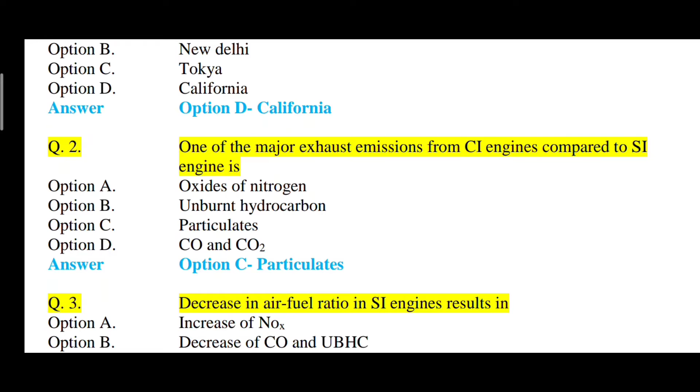Question number 2: one of the major exhaust emissions from CI engine compared to SI engine is option A, oxides of nitrogen, option B, unburnt hydrocarbon, option C, particulates, option D, CO and CO2. So the correct answer is option C, that is particulate matter. It is observed that PM, meaning particulate matter, is the main component of the exhaust gas, which is very toxic and very dangerous, and it is a mixture of liquid and dry particles. So option C is correct, particulates.

Question number 3. Decrease in air-fuel ratio in SI engine results in option A, increase of NOx, option B, decrease of CO and unburned HC, option C, increase of CO and unburned HC, option D, none of the above. So the correct answer is option C, that is increase of CO and unburned hydrocarbon.

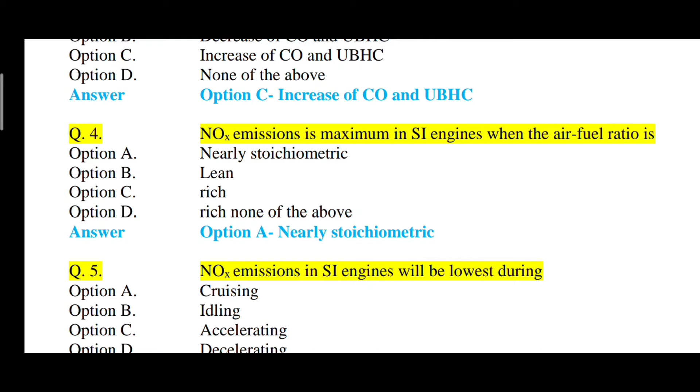Question number 5. NOx emission in SI engine will be lowest during option A, cruising speed, option B, idling, option C, accelerating, option D, deceleration. So the correct answer is option B, that is idling. During idling, the engine is steady. Only the power required to run the engine is needed, and in such a condition the power generation is very low. So temperature is also low, much less than 1100 degrees Celsius. So there is no question of NOx emission. So it is observed that during idling, NOx emission in SI engine will be lowest.

Question number 6. Photochemical smog is mainly due to option A, NOx and HC, option B, soot and particulate matter, option C, CO and CO2, option D, excess O2. So the correct answer is option A, that is NOx and HC. Photochemical smog is mainly due to NOx and HC. Question number 7. Alcohol is the major source of emission of option A, HC, option B, aldehydes, option C, oxides of nitrogen, option D, soot. So the correct answer is option B, that is aldehydes.

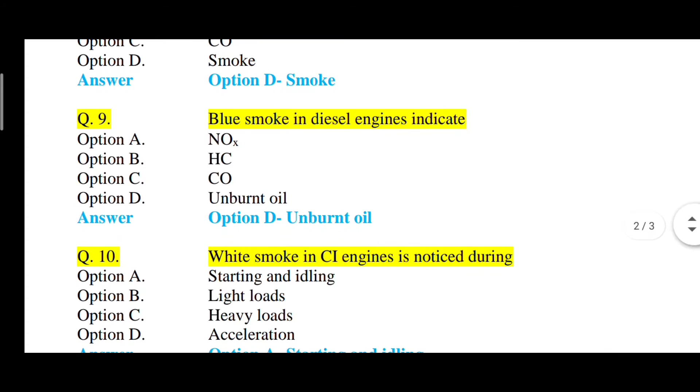Sorry. Question number 8. Fumigation technique is used to control option A, HC, option B, NOx, option C, CO, option D, smoke. So the correct answer is option D, that is smoke. Question number 9. Blue smoke in diesel engine indicates option A, NOx, option B, HC, option C, CO, option D, unburnt oil. So the correct answer is option D, that is unburnt oil. If oil remains unburnt, we can see blue smoke in a diesel engine.

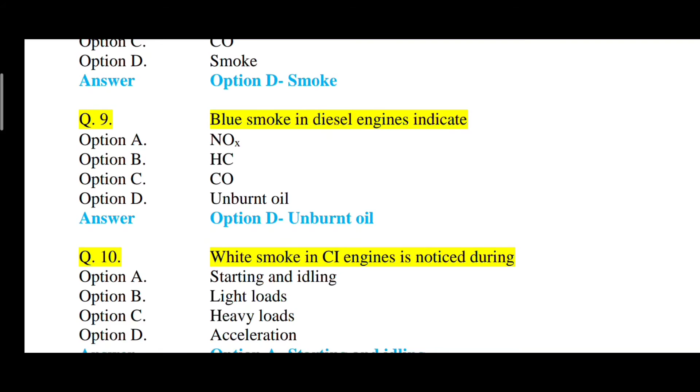Question number 10. White smoke in CI engine is noticed during option A, starting and idling, option B, light loads, option C, heavy loads, option D, acceleration. So the correct answer is option A, that is starting and idling.

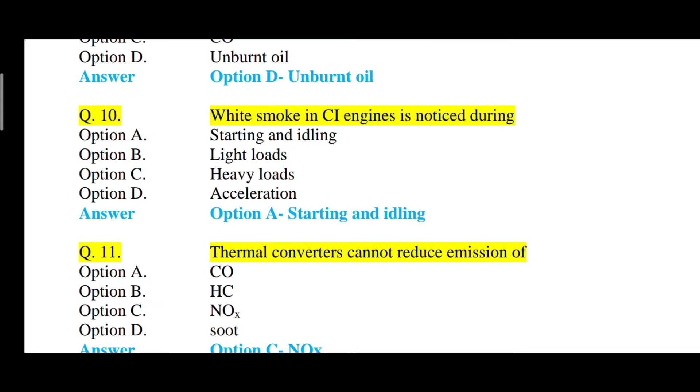So during starting and idling, as you all know, when the engine is not working and we start that engine, it is observed that the engine will give white smoke, because some of the burned exhaust gases are still there in the engine cylinder, and at the start they try to escape. So that is why white smoke in a CI engine is noticed during idling and starting. So option A is correct.

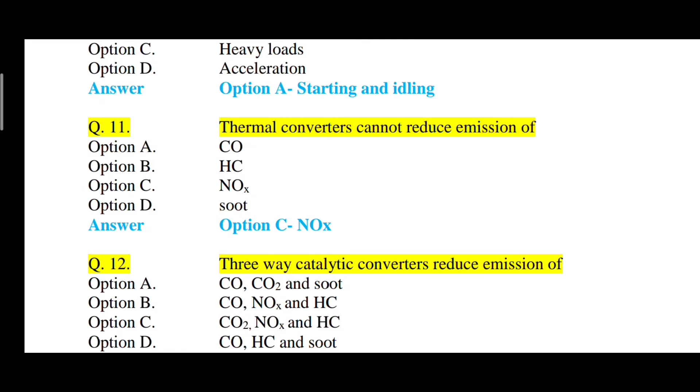Question number 11, thermal converters cannot reduce emission of: option A CO, option B HC, option C NOx, option D soot. So the correct answer is option C, that is, NOx emission. A thermal converter cannot reduce it. So option C is correct.

Question number 12, a three-way catalytic converter reduces emission of what? Option A CO, CO2 and soot. Option B CO, NOx and HC. Option C CO2, NOx and HC. Option D CO, HC and soot. So the correct answer is option B, that is CO, NOx and HC. A three-way catalytic converter reduces emission of option B, CO, NOx and HC.

Question number 13, platinum and rhodium promote the oxidation of what? Option A CO and HC. Option B CO and NOx. Option C CO. Option D HC and NOx. So the correct answer is option A, that is CO and HC. Platinum and rhodium promote the oxidation of option A, CO and HC.

Question number 14, rhodium promotes the reduction of what? Option A HC, option B CO, option C NOx, option D CO and HC. So the correct answer is option C, that is NOx.

Question number 15, efficient operation of catalytic converters requires maintenance of what? Option A temperature, option B equivalence ratio, option C option A and B, option D pressure. So the correct answer is option C, that is option A and B, meaning temperature and equivalence ratio.

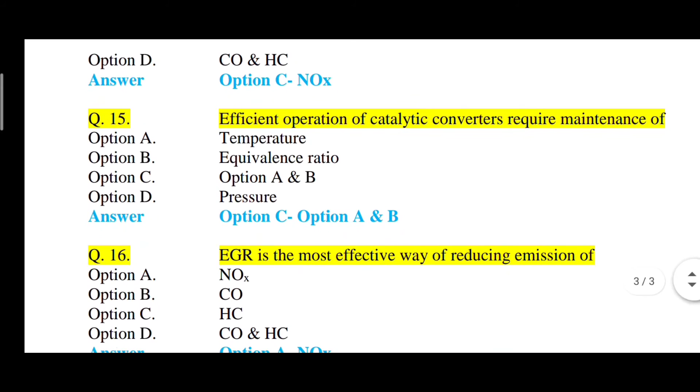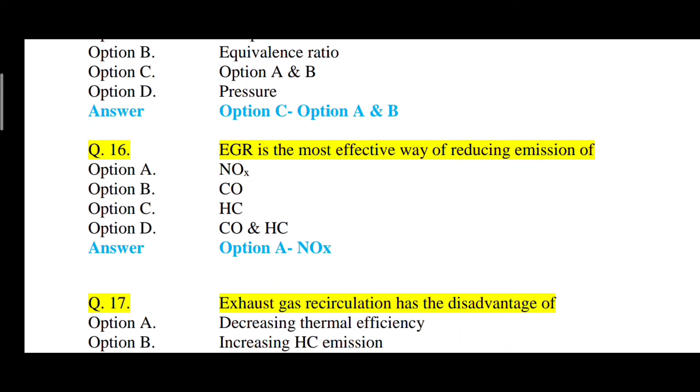Question number 16, EGR is the most effective way of reducing emission of what? Option A NOx, option B CO, option C HC, option D CO and HC. So the correct answer is option A, that is NOx. EGR, meaning exhaust gas recirculation, is the most effective way of reducing emission of NOx. As you all know, NOx starts forming beyond 1100 degrees Celsius. So if we use exhaust gas recirculation, the temperature drops and there will be a reduction in NOx.

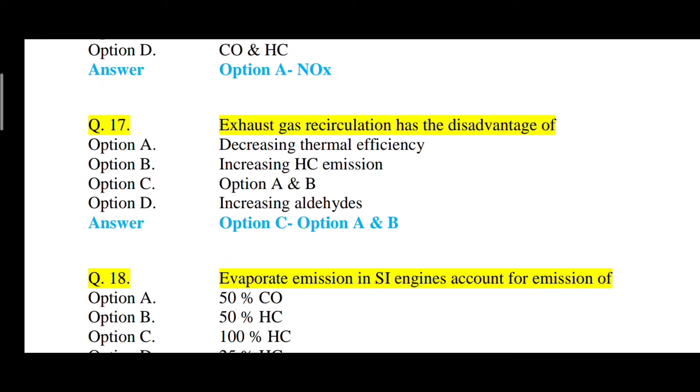Question number 17, exhaust gas recirculation has the disadvantages of what? Option A decreasing thermal efficiency, option B increasing HC emission, option C option A and B, option D increasing aldehydes. So the correct answer is option C, that is option A and B. As in the earlier case, because of EGR, exhaust gas recirculation, the temperature reduces, and because of that thermal efficiency decreases, and an increase in HC emission is also found. So option C is correct, option A and B.

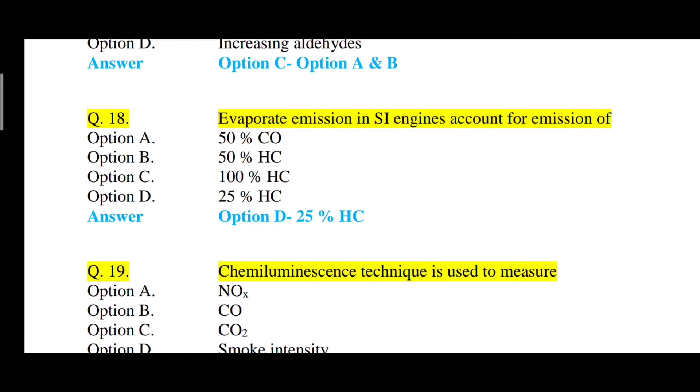Question number 18, evaporative emissions in SI engines account for emission of what? Option A 50% CO, option B 50% HC, option C 100% HC, option D 25% HC. The correct answer is option D, that is 25% HC. Evaporative emissions in SI engines account for emission of option D, that is 25% HC.

Question number 19, the chemiluminescence technique is used to measure what? Option A NOx, option B CO, option C CO2, option D smoke intensity. So the correct answer is option A, that is NOx. So this technique is used to measure NOx emission.

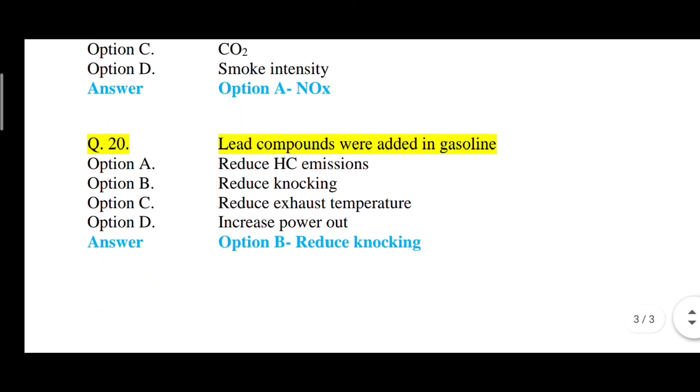Question number 20, lead compounds were added in gasoline to: option A reduce HC emission, option B reduce knocking, option C reduce exhaust temperature, option D increase power output. So the correct answer is option B, that is reduce knocking. Lead compounds are added in gasoline to reduce knocking.